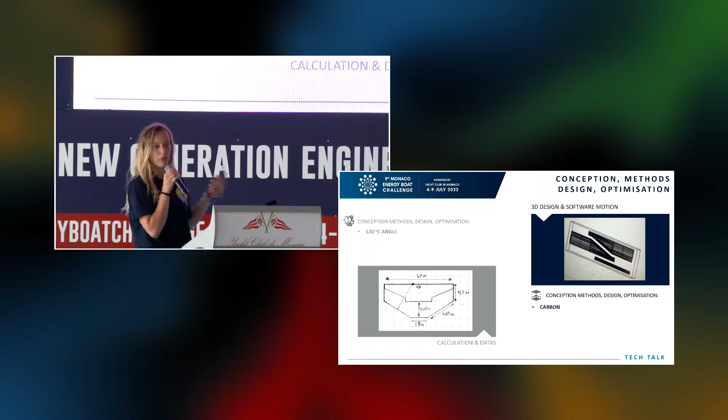The V-foil we have from another team called Dutch Solar Boat Team. Our V-foil basically consists of 3 foils, made from carbon. In the bottom you can see a 120 degree angle, and in the back we have a T-foil, also made of carbon fiber.

How did we make this? We made the foils with carbon, and we made struts. With the struts we connected the foils, and through press lamination we connected the struts to the foils.

But we have some problems, so we cannot sail at the moment on the hydrofoils because the boat could not handle the pressure. Our hull actually broke a bit in the middle, so we fixed it again with carbon, and it's also very hard for us to sail stable.

So we have a control system in our boat, based on the height of the boat and the difference between the boat and the water, which allows us to sail stable. But at the moment it's not really optimized, so we need to work on that.

So far we did some testing on the foils - you see the picture on the left. We had some problems with our engine, so we used a tow boat to move the boat forward, but it was not very stable. Due to the weather conditions, our top speed was 17 kilometers an hour.

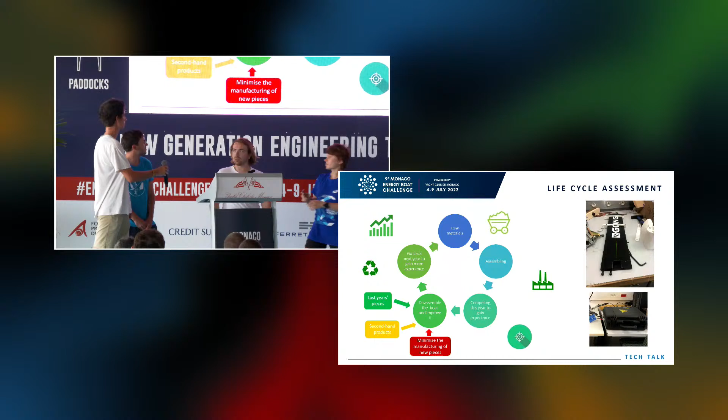So we tried to use recycled parts, so from last year's boat, or to buy parts from other teams' boats. For example, the battery is from the Estaca team, and we try to reduce our buying of new stuff.

One innovative part of our boat is an application that the drivers use to get information from the battery directly in front of him. So he gets the speed, the temperature, and the intensity and the voltage of the battery and the control part of the battery. And he can then communicate this information to his partners on land.

So to conclude, the main innovative parts of our boat is the direction that we entirely designed and built part by part, and this application that calculates everything and controls everything. Thank you for your attention.

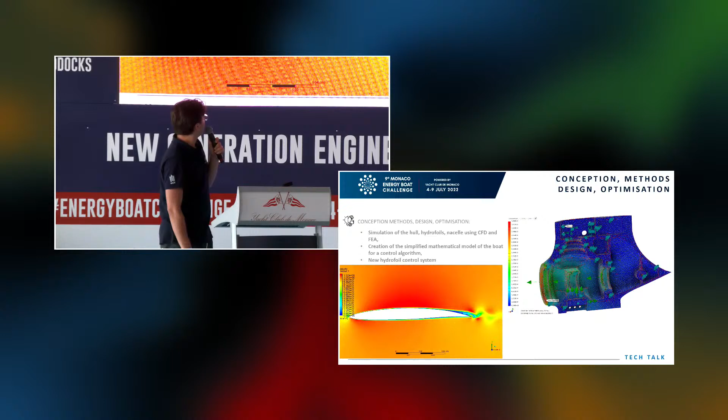Conception, methods, design. We make heavy use of CFD simulations and FEA simulations, as shown here. Here are some of the results from our CFD simulations for the hydrofoil and the nacelle, showing flow around these 3D objects. This is just a 2D slice, but it works for 3D also.

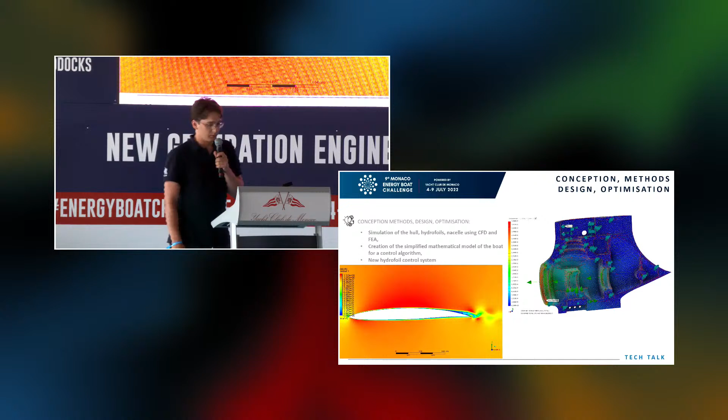We also happened to create a mathematical model for our boat, just to develop the algorithm for controlling the hydrofoils during flight and during ascent. And this year we've also designed, though it hasn't been implemented yet, a design for the new hydrofoil system because our last one didn't really do a good job.

The materials used in the production of the boat, which was actually started like 3 years ago and we finished last year, is mainly carbon fiber with aramid honeycomb and epoxy resin. But then there's also some glass fiber and aluminum and steel, mostly for the drivetrain and mechanical parts, and obviously electronics.

This year we've faced a couple of problems, the main one being the relocation of our workshop, as shown on the picture on the bottom. Our old one was destroyed by the university for some new building they're putting up right now.

And also everyone, I'm sure, has been really hit by the semiconductor shortages, which is a big hit for electronics. Also, there's still some COVID in Poland, and as we said, not proper machining equipment due to the workshop relocation.

For our testing, we also use CFD to validate our designs. Or rather, we validate our results afterwards when testing on water, checking if everything's all right, if it works as it should, as it was simulated before.

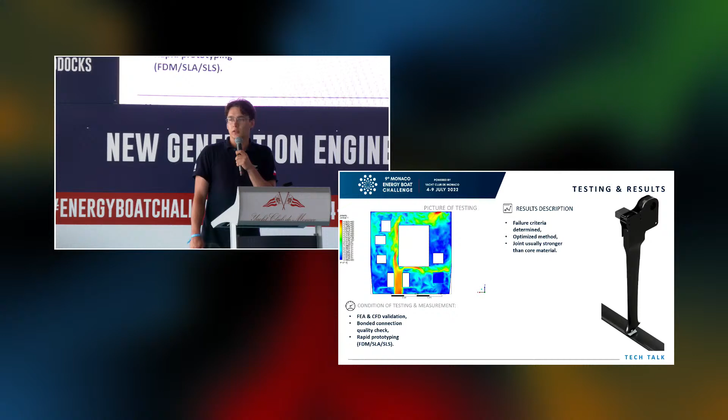We've come to an interesting conclusion that usually when the correct application of the joint is used, the joint is stronger than the core material, so we won't have any breakage on joints, just material breaks.

As for the life cycle assessment, this is an eco-friendly topic, as will be the next slide. We try to do everything eco-friendly if possible.

Every hydrofoil can be used on another boat that's compatible in terms of the mounting point, which we try to do with our boats as much as possible.

Also the solar panels, which is a very tedious and difficult process, can have their individual cells replaced in the whole panel, which also extends the life cycle of the panel.

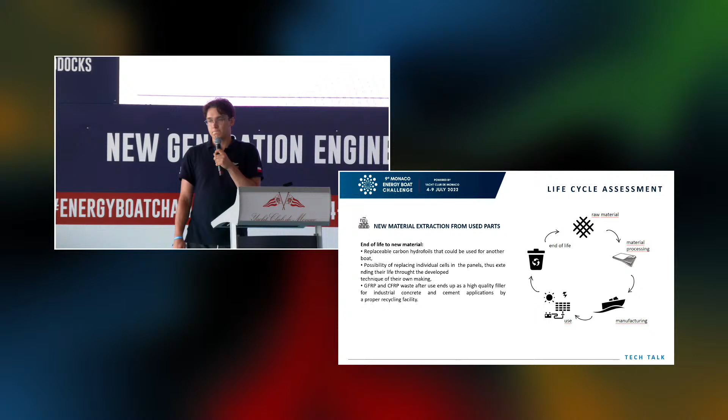As said here, glass fiber and carbon fiber, after they've been used to build the hull or the hydrofoil, can be reused as high-quality filler in industrial applications.

More about the ecological design: the motor cooling system is built completely out of 3D printed parts, and the water is taken from the body of water we're currently on, in this case the sea, and it's used for cooling.

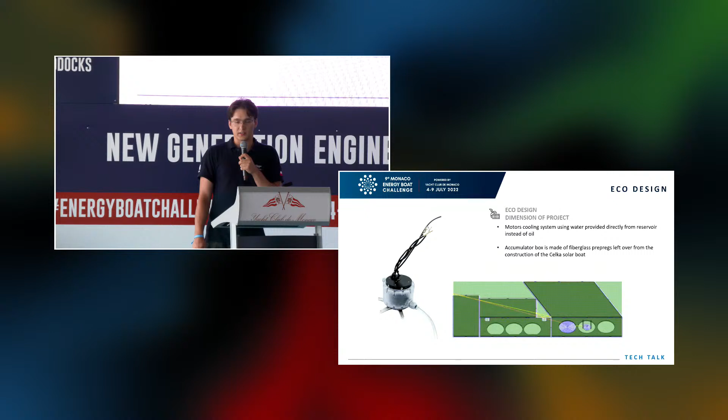The accumulator, the battery box, is made of fiberglass that's been left over from the boat's construction.

The new thing we brought this year with our boat is the new accumulator box, which has an unusual shape, allowing us to save a bit of space inside the electrical box. As I said before, it's designed from leftovers, so it's pretty eco-friendly.

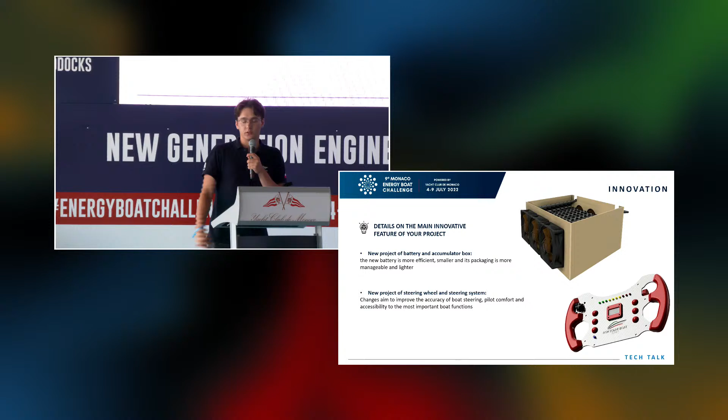We also have a new steering system which supports a steering wheel, just like on the render here on the bottom right. It's a bit easier to use for our driver, and it's also much smoother than the previous implementation, which was like a yoke drive.

As for the industrialization of the project, we mainly focus on getting as much knowledge as we can out of building these boats. So our value really lies within the people.

We have many people currently in the industry working as consultants in different areas, mostly well educated in composite materials, software engineering, and electrical. Coming out of our project, you can really find a job, no problem. So I suppose that's one way of using our project in the industry.

We also have an idea about building end-to-end solutions with solar boats or just composite boats, because we have a lot of know-how in this area.

Okay, thank you for your attention.

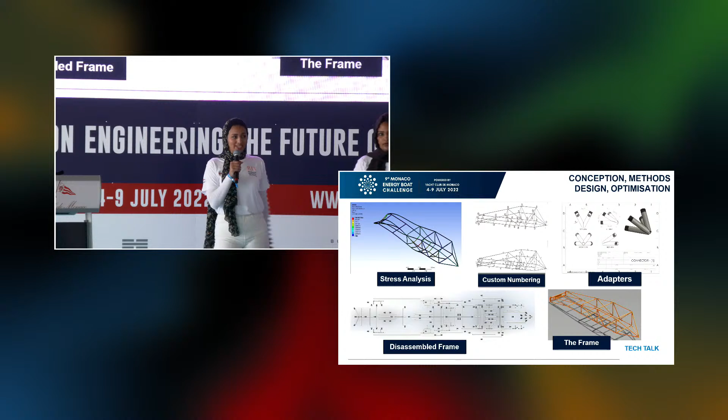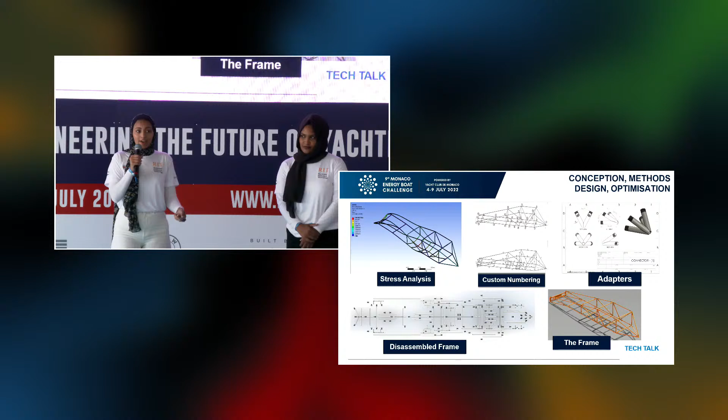Imagine you want to ship your boat from here, Monaco, to the UAE, but then you realize the hassle of shipment, the time-consuming process, and how long of logistics it would take. We are here to give you the new innovation that we came up with after we have seen last year's team suffer with the shipment. We are here to introduce to you the dismantleable boat. How? You can literally dismantle the boat, put it in your carry-on, and just take it on the go.

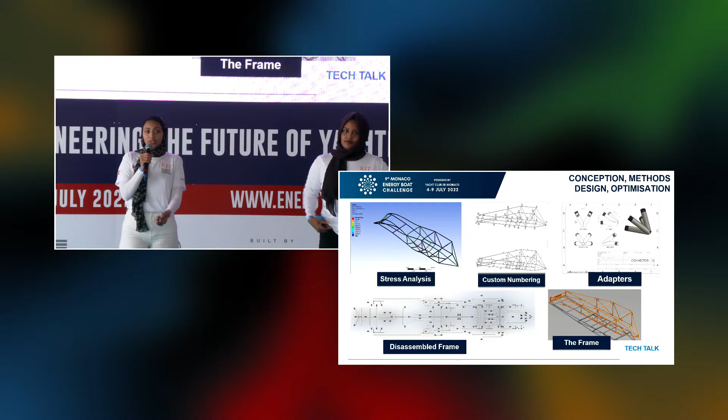The way we did it, we have 55 connectors and 88 adapters. And the concept started with SolidWorks design, each being rejected by our mentor, to next reach to the mathematical modeling, and that would give us crucial data that the team would need to anticipate the races and how the behavior would go. With that, we didn't stop.

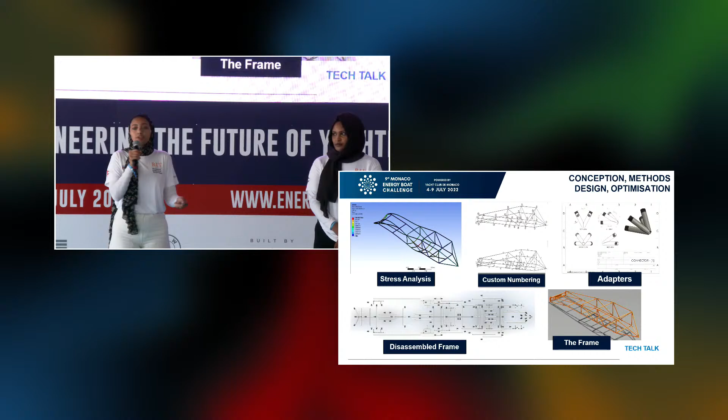We did ANSYS simulation, where we were able to find the stress points on the frame and the hulls, also the propeller. We have experimental data, which will next be used by the next team to customize whatever they want to customize in the boat.

With that, we next moved on to choosing our materials. The frame itself is made out of 3 different materials: stainless steel, mild steel, and aluminum, all combined together to make up the frame. These were used for the pipe fitters, the tubes itself, and the metal plate at the back to hold the motor. The project itself took us 9 months to finish and cost us about 21,000 dollars.

And like the beautiful streets of Monaco, our journey was not straight. We had issues with the adapters where they were not compliant with the pipes that we had, so we had to modify them to fit the pipes that we already had at the workshop. Also, the center of gravity was another issue.

Because of that, we were able to come up with the idea of having a movable IP box to adjust the center of gravity whenever we need. Also the drag, and that's why we came up with the idea of having a movable motor plate at the back, so that would help us reduce and minimize the drag. And the symmetry was no longer an issue after having an adjustable boat.

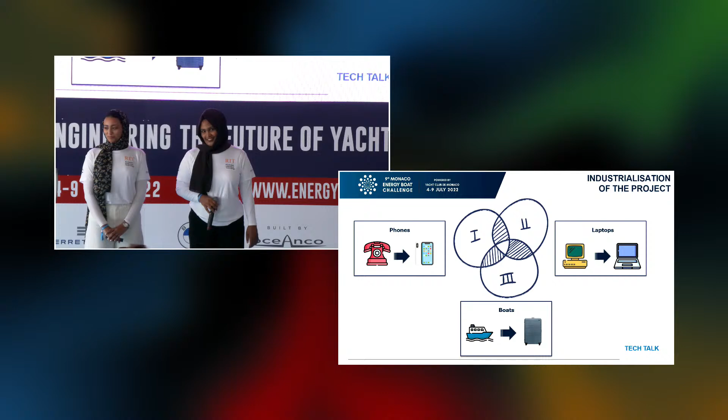Beautiful, congratulations. Thank you. Is someone ready for the question?

I was wondering, if you had no limitations in your budget, what would you like to investigate more? Different material, definitely, because our boat is a bit heavy, so if we could use a different material like carbon fiber that would be great. It would make it much lighter and probably much faster as well.

I was wondering, if you take the boat apart and assemble it here on the dock, how are you dealing with vibrations in the boat while sailing? The adapters themselves are union adapters, and they're welded onto the tubes themselves. We did it and we took it out - they're back at our university. Vibrations are handled well because it's made of mild steel and the adapters are stainless steel, so it's sturdy.

Thank you. Another question? The same? Perfect. So congratulations, that was a very, very good presentation. Sorry, Florestan, I didn't see it.

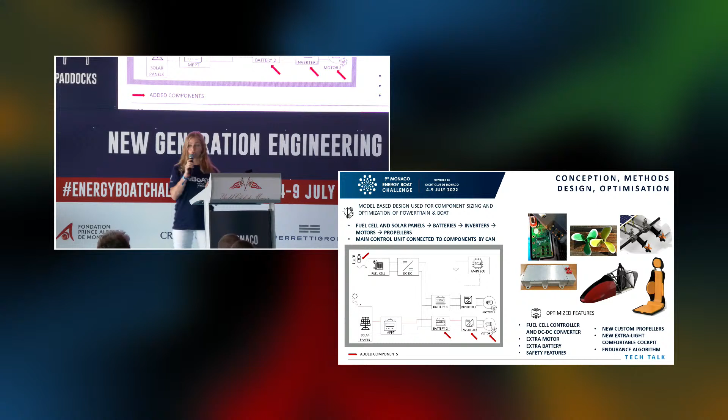This year, we decided to optimize almost every component of our boat. As you can see, we decided to build DC-DC boards for our fuel cell. We decided to implement a double motor configuration. We added another battery, we restructured our cockpit with a new seat, and we 3D printed custom propellers.

The 6-month production period with a 30,000 euro budget, which we had to efficiently manage among the different division teams, required the use and mechanical expertise of different materials. We resorted to 3D printing for our custom propellers. We used recycled carbon fiber for the cockpit. We used bamboo canes for the solar panel frame. And we even used a byproduct of orange and cacti fiber for the cushions of our seat.

The production wasn't exempt from problems, many of which arose during testing. First of all, we had to face the troublesome integration between 10 independent embedded devices, as well as the electrical and mechanical coordination between our 2 motors. Another big issue we faced was the tuning and fixing of the algorithms while at sea. We were often, in fact, on another boat connected to Futura with cables directly to the motors.

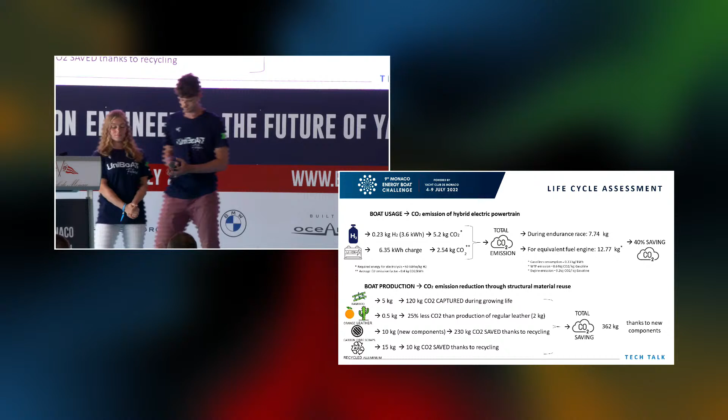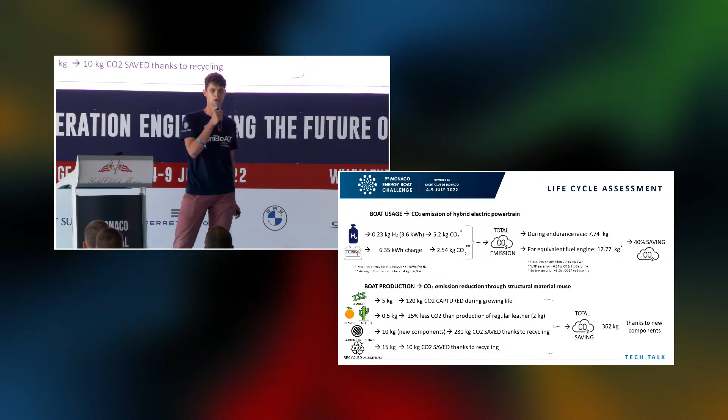Hi everyone. Talking about life cycle assessment, this year we performed an assessment on carbon dioxide emission savings. Regarding the boat usage, if we compare an internal combustion engine with our hybrid electric powertrain solution, we are able to save more than 40% of carbon dioxide during an endurance race.

Regarding the boat production, this year we used several different materials like bamboo, orange leather, recycled carbon fiber scraps, and also recycled aluminum. With all these materials, we are able to save more than 360 kilograms of carbon dioxide.

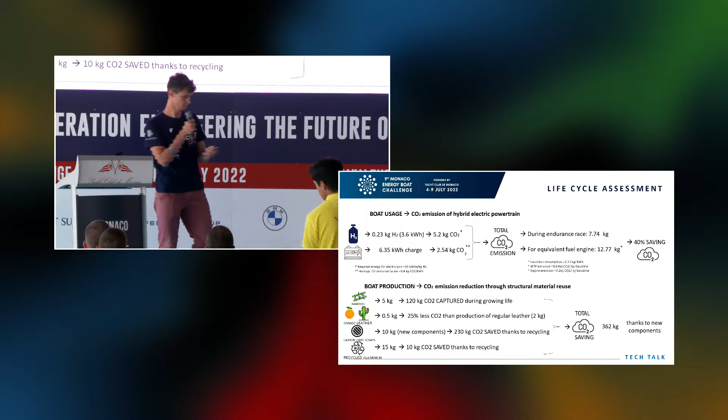Going deeper with some materials, bamboo is a valid alternative solution to aluminum, and we exposed the material itself to an open flame in order to increase its mechanical properties.

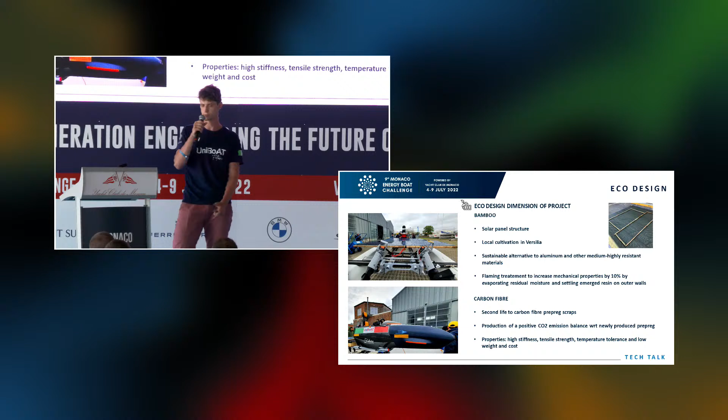Regarding carbon fiber, we use a method that gives a second life to carbon fiber prepreg scraps, and one purpose of it is the production of a positive carbon dioxide emission balance.

Talking about many innovative features, the first one is the implementation of 2 motors, also because this year the total energy available on board has been doubled respect to last year. Each motor has its own hydrodynamic profile, its own inverter, and they rotate in opposite directions.

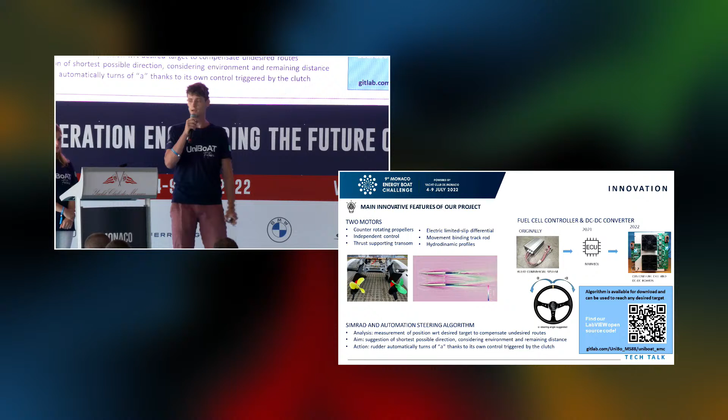In addition, we implemented a differential electric control to make the curve narrower, for example during a championship race or a slalom race. The second main innovative feature is the fuel cell: the realization of a custom fuel cell controller and a custom DC-DC converter.

The DC-DC converter allows the fuel cell to recharge our batteries, and it switches at a higher frequency in order to have a lightweight component. The fuel cell controller allows us to have an efficiency of 48% due to less loss in the components.

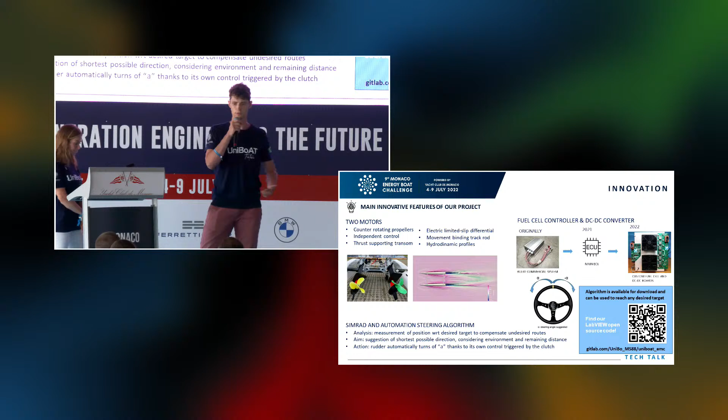The last but not least innovative feature is the implementation of the route assistance algorithm. It suggests the azimuth of the shortest route possible in order to reach a target like a buoy, and it provides this information to the automatic rudder, and thanks to its own controller implemented by the team member, the automatic rudder starts to steer.

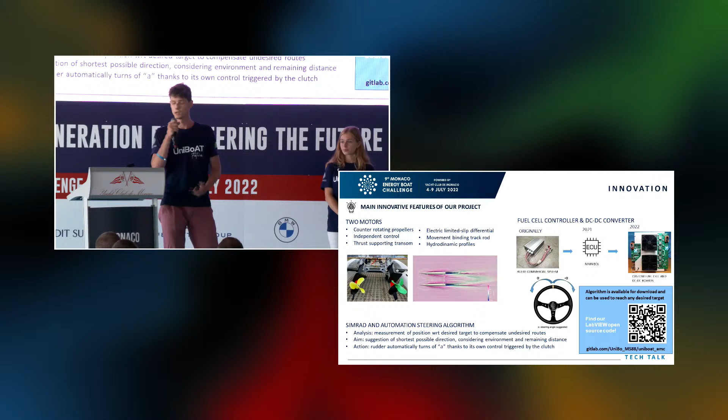In addition, also this year we decided to share with other teams this algorithm because we believe in the philosophy to share information and grow up together.

Regarding the industrialization of the project, we have in our boat a lot of redundancies because we think that it's a key concept in order to attain reliability.

Regarding the efficiency gain, we have, for example, lightweight components, but also the route assistance algorithm; we increase our efficiency from several points of view.

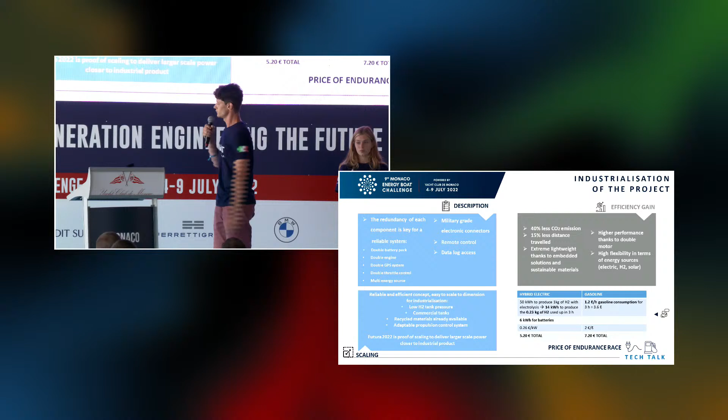We have a custom electronic board and other custom parts, but also some standard components like transducers that are already available on the market, and thanks to that, our prototype is really closer to an industrial product.

Lastly, we made a cost-benefit analysis, and we compare our solution to a boat with a gasoline engine, and we are able to save more or less 2 euros during an endurance race.

Just to conclude, also this year we decided to implement a mixed source energy solution because we think it is the right solution in order to have good performance in terms of durability, but also in terms of max power and max velocity. I conclude.

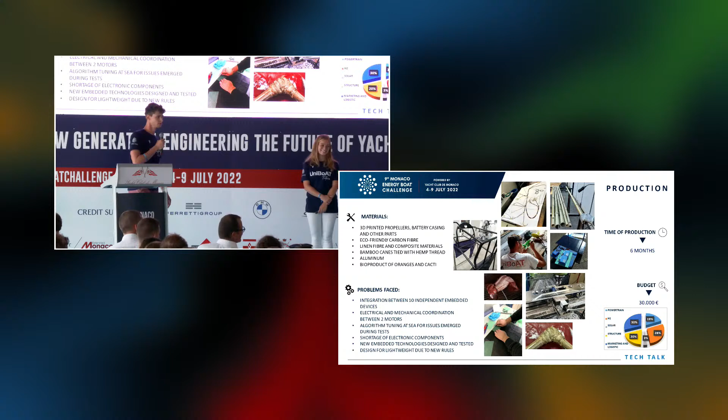No problem. A question about the weight. Have you considered the boat that you had last year versus the boat of this year? Is there a big difference in weight or not? You are going to a double motor instead of a single motor. Since you are in the water, and one way or another you are displacing water, the weight plays a role. Have you considered also putting on board maybe a very light pilot or not?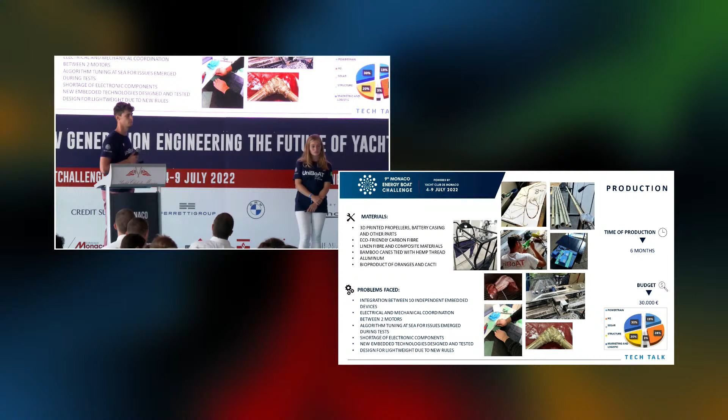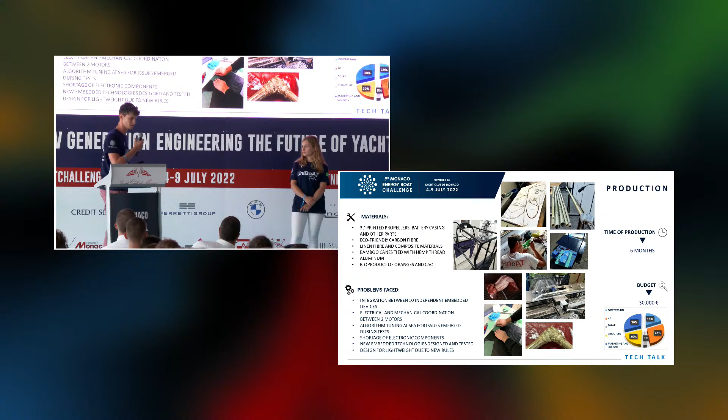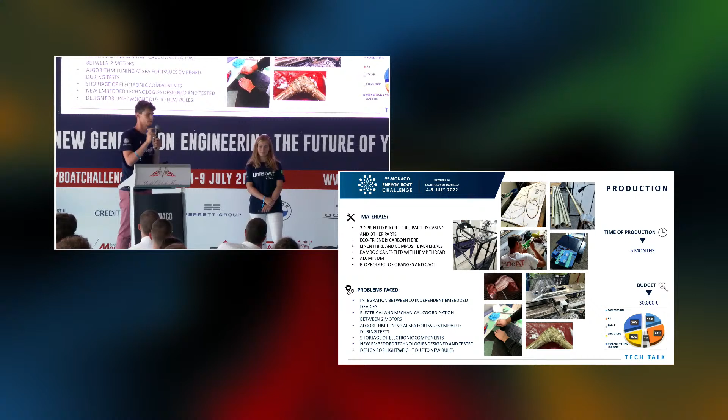Yes, we take into consideration the weight, of course. In fact, we have double of a lot of things, as I said, redundancies. So 2 batteries, 2 motors, which increases the weight a lot. In general, we decided to substitute some materials, like the structure panel from aluminum to bamboo, and also the cockpit from steel to aluminum. With this solution, we try to also respect the rule on total weight.

A question about material: in which material are you making your propeller? To design your propeller, you use a 3D printer? You said you made it with a 3D printer. And in which material are you making the propeller? Material, the propeller? Yeah.

With nylon. We realized the custom propeller with a specific study about it, and we designed it in 3D, then implemented and realized it in nylon material.

I have another question - I'm sorry, but you know I really push open source. I know you have a specific battery with a very high power density. Congratulations, by the way, for open sourcing this automatic drive system that you are offering to other teams. I guess that could be smart, especially for the long distance race. But could you please share with us a bit more detail about the battery you are using?

Yes, we have 2 packs of 3,000 watt-hours each, so in total a little bit more than 6,000 watt-hours. They use Li-ion cells. If you want the characteristics of the packs, I can give you: 21 in series and 14 in parallel cells, VTC6 cells. This is our pack. We realized it 2 years ago, also with the help of a university spin-off.

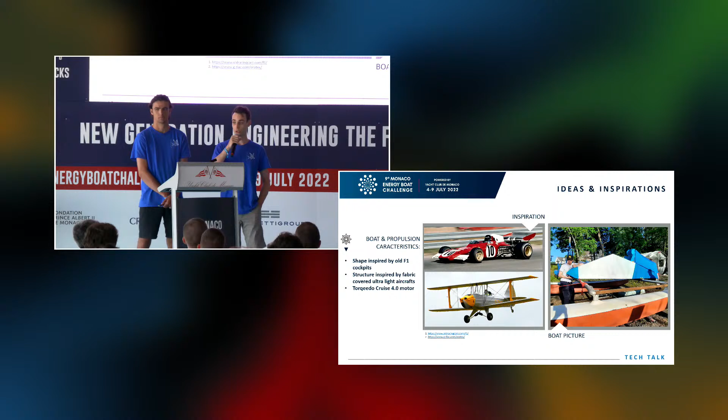For the inspiration of the boat, first the cockpit was inspired by old F1 cars, so we can see it a little in the shape, but mostly the structure was inspired by ultralight aircraft. Most of the team has an aircraft background. It's an aluminum framing with ultralight cloth that shrinks with heat around it, so it keeps the shape really well and is really rigid. We use a Torqeedo Cruise motor.

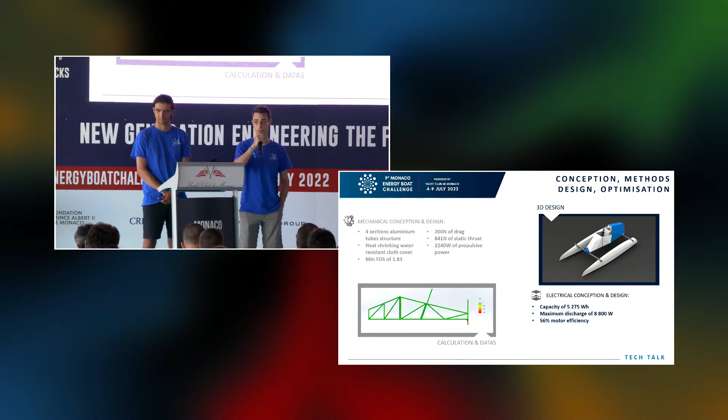For the framing, we use a 4-section aluminum tube frame. The boat can be shipped and dismantled into 4 parts, and we can reorient them to have a really small volume, so it can be shipped easily. The boat has around 200 newtons of drag and 800 newtons of static thrust. The motor efficiency is about 56%, and the maximum discharge of the motor is 8.8 kilowatts.

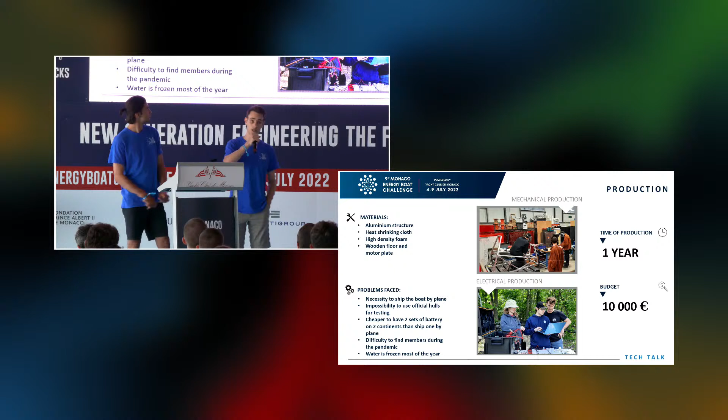For the materials, as I said earlier, we use an aluminum structure with heat-shrinking, water-resistant cloth. We also use a lot of high density foam for things such as the seat and headrest, and wood for things like the floor and the motor mount. The wood, however, is really hard to ship by aircraft because of regulations, so we had a few problems with that.

Speaking of problems, first of all we need to ship the boat from Canada - it's a big flight. We also initially looked at shipping the battery, but it was way too expensive to ship lithium-ion cells by aircraft. So instead we chose to have 2 batteries: we built our own battery in Canada, and we have our second battery, a Torqeedo battery, here in Monaco.

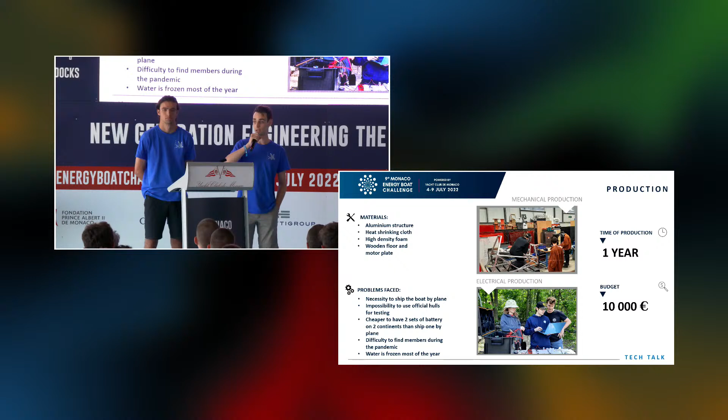Also, because of the pandemic, and we started the project during the pandemic, we had a lot of difficulty finding team members. So we're really grateful for the team members we have. And as I said, water is frozen most of the year, so testing is not easy in Canada. The project took about a year to build and cost about 10,000 euros.

About 40% of the project budget was only for shipping the boat to Monaco. That said, we still managed to do some testing a few weeks before shipping. We had a partnership with the Lac des Deux Montagnes sailing team, and we used recycled Hobie Cat 16 hulls that we modified to be a bit larger. However, the center of gravity and the weight of the boat were not the same, so we had to adjust for that, since the Monaco hulls couldn't be shipped to Canada. We also had a different battery, so the electrical specifications were a bit different.

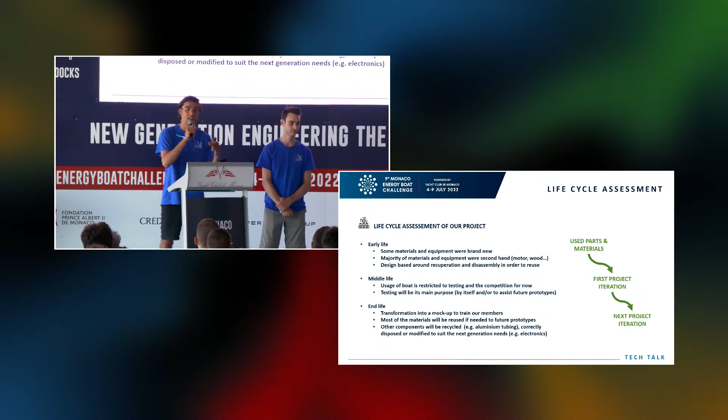Thank you, Mathieu. So for the life cycle assessment, we assessed the early life, meaning the construction of the boat. We used some new materials, but the majority of our materials and equipment were actually secondhand—our motor and battery are secondhand, as well as some wood and metal parts we reused. For the midlife, when we're using the boat, we just use the electricity from the battery. In Quebec we have lots of hydroelectricity from our dams, so we have almost zero emissions during consumption of our electricity.

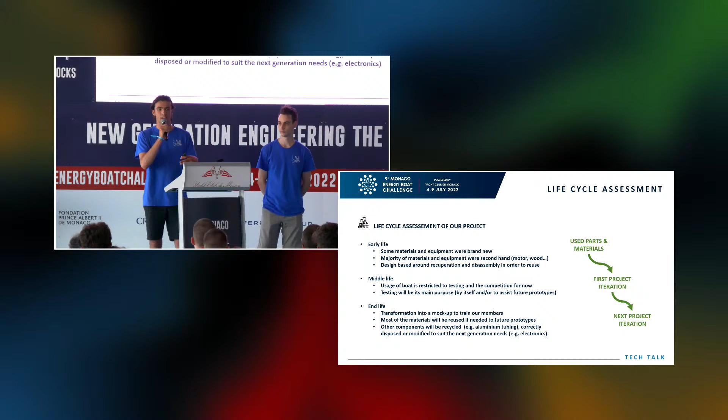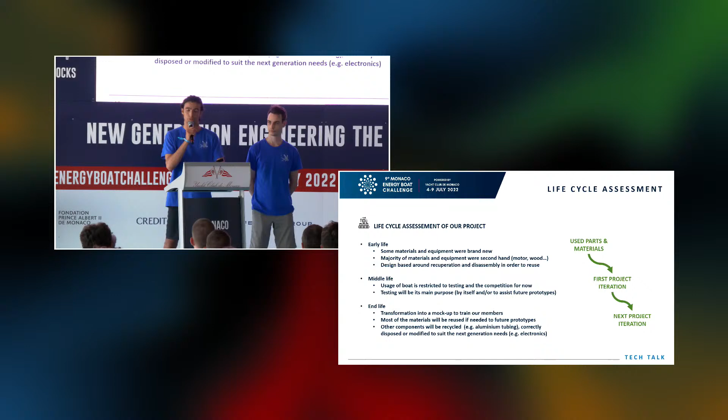Now for our eco-design—we put a lot of effort into this part. First of all, we used a lot of recycled materials. Fun fact: the pilot's seat is made of reused foam. The foam came from a group of students beside us who were scrapping it, so we took it, shaped it up, and made a nice seat for the pilot.

As I said, our main innovation was that we could take the boat apart, put it in a box, and ship it by plane—very cost effective and eco-friendly for this part.

Last of all, industrialization. We used a lightweight and rigid structure, which allowed us to have less weight to ship by plane—again, better for the environment and cost. We also used corrosion-resistant materials such as aluminum, so we needed less maintenance and didn't need any chemicals to protect the metal inside our boat.

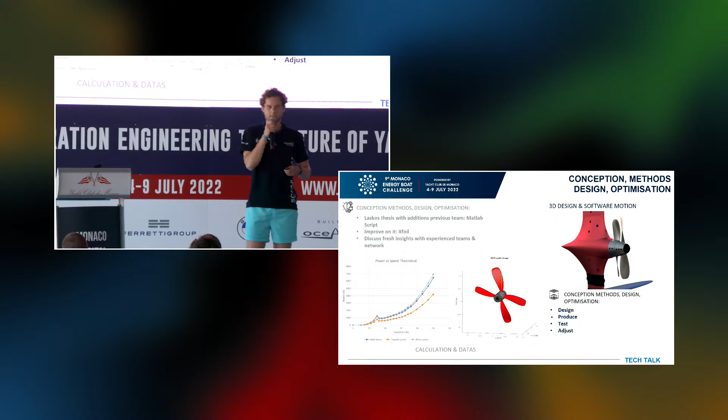So, beginning of this year, we started the innovation of our counter-rotating propeller. It's a concept that has not yet been widely researched, but we think has a lot of potential. The idea of a counter-rotating propeller is that the rear propeller counteracts the turbulence that the front propeller creates.

We started with an open source code that was already there. It was actually created by our first ever solar boat team. It is a source code that with just a few characteristics designs a whole propeller for you. We improved on this script by adding Xfoil, which will make the script more advanced when weighing the amount of drag versus lift you have in your propeller. After your design, of course, you have to come to production.

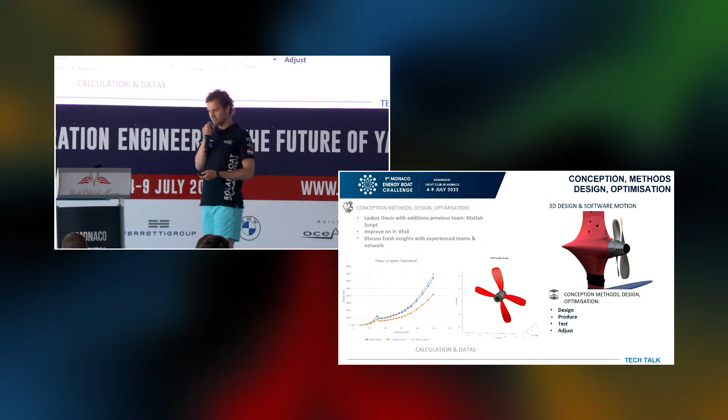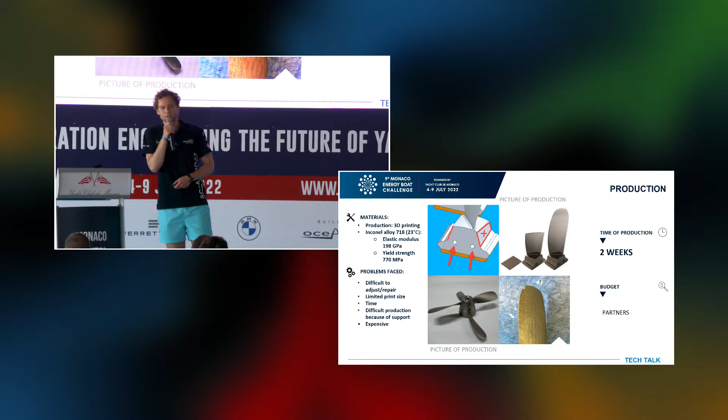Now, the method of production was a special one. So get ready for our second big innovation, because for the first time ever, we 3D printed our propellers, out of Inconel. This production method, as well as the material, has a few advantages. 3D printing is a quite sustainable process for producing our propeller in comparison to other production processes like casting and milling. It's also known as additive manufacturing, and it uses 98% less material than these other methods.

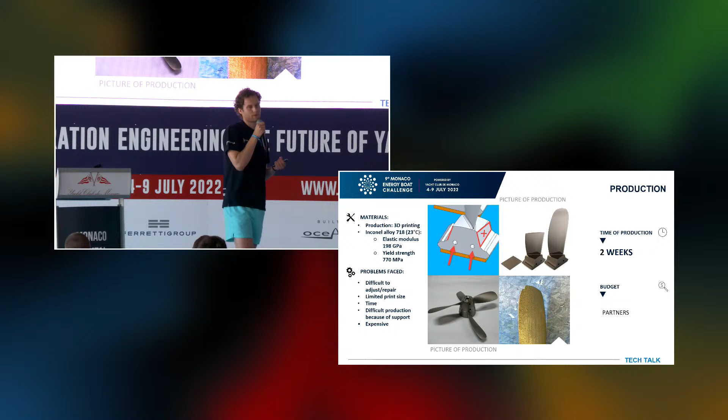Besides this, you are able to play with more complex shapes when 3D printing, and you are able to play more with your design. Inconel is a very strong metal. To demonstrate that, it's usually used in airplanes, so it's suitable for quite some extreme conditions.

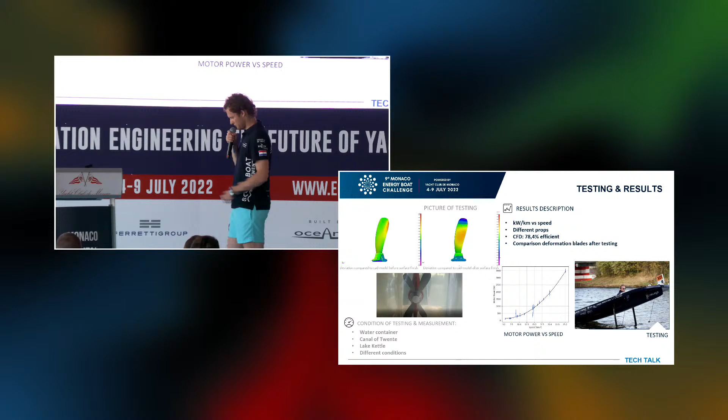Innovation like this, of course, wouldn't be fun without a few challenges. So we'll come back to those challenges when we talk more about industrialization. Now, besides challenges and their solutions, testing is needed to get a better iteration of our propeller.

We found out this year how important early testing is. So we test in and out of the water. Out of the water, we run computational fluid dynamics to get an indication of the efficiency of our propeller. Right now, the open water efficiency of our first iteration is 78.4%.

We also do some in-the-water testing. We like to know how the power we put in relates to the speed that's coming out. We do this in our home waters at the famous Canal of Twente, and we also like to simulate some more Monaco-like scenarios on the Lake Kettle.

So, how do we think our propeller is valid for racing? That you'll find out the coming few days. Do we think our propeller is fit for the industry? That I'll come back to in a bit.

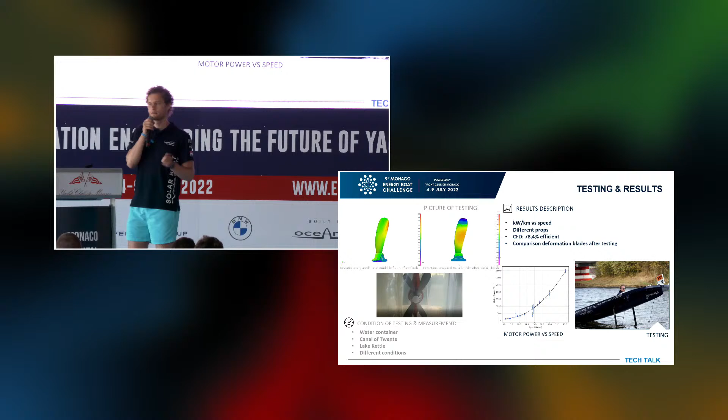Now, after all this talk about the propeller, I wanted to talk about something I stated in the beginning. The propeller is something that is characteristic for the way we look at sustainability and innovation here in Twente. Why is that? Because our other projects also have the same philosophy, one where innovation and enlarging the life cycle of our projects go hand in hand.

We stated a few examples here. For example, our new modular driveline, where it's very easy to get components out, optimize them, or even swap them. Also, we have a new modular solar panel system in which we can remove our solar panels, work on them, and also place them on our new boat.

Besides enlarging the life cycle of these projects, we also like to think about eco-dimensions when thinking about our project. Now, the main object we were talking about, the propeller, it was produced inside the region of Twente, and we actually like to keep a lot of our partners close. Half of our partners are inside the region of Twente. And lucky for us, as the Netherlands is quite a small country, other partners are always close.

Making our project more ecological and more efficient doesn't end here. Next year, a fresh group of students will work on new projects to support them. They'll tell you about our new gallium nitride transistors for our motor controller, and our electronic stability control system. But more about that next year, as we like to keep everybody a little bit excited for our projects.

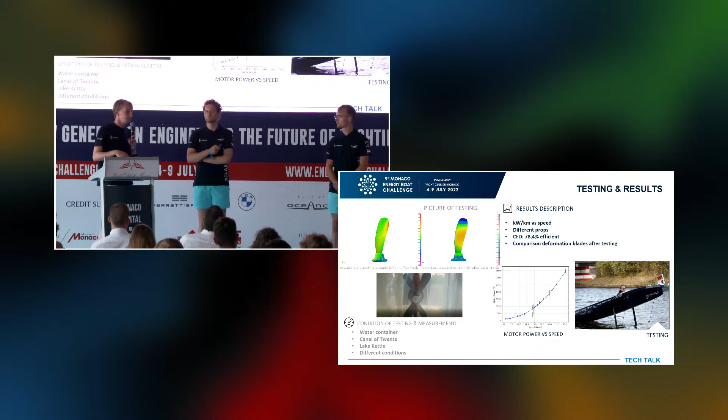Yeah, well, funny that you ask that, because we see a difference, but we're not ready to show the numbers yet. We had some different tests with an endurance test, and compared to last year, we could squeeze out more range. So that was good, but we lost the numbers from the year before - we only know that we came further, not how much. Since we did not change the boat, we can see we come further with this drivetrain, and we hope to compare this year to last year, and improve it further in the coming years.

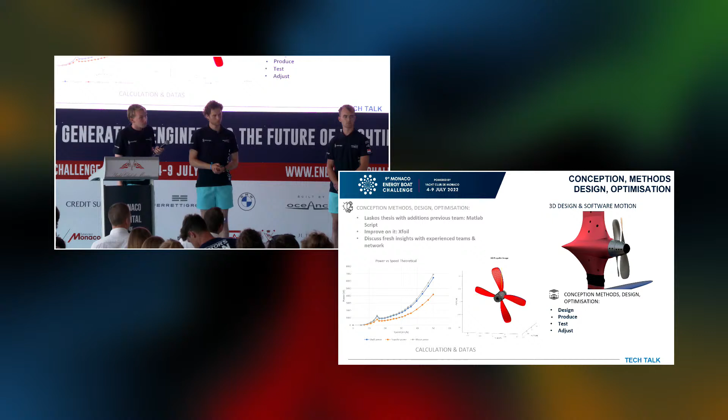Just to give an overall answer, we all know that a contra-rotating propeller can increase efficiency from 6 to 10%, let's say the average is 8% efficiency increase, and especially another 4% if we have the propeller in front of the rudder.

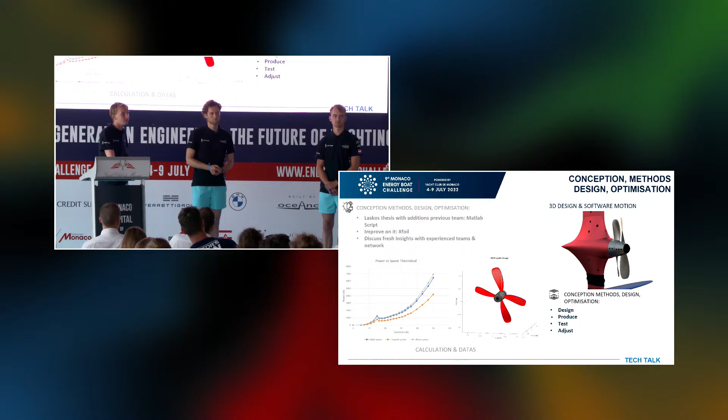I was very concerned on the previous slide about overall efficiency. Could you describe the efficiency calculations you have done on your boat? And another question: last year you developed a specific adaptive foil with a deformation material, linking the starboard and port foils together with a specific material. Could you give us feedback on that?

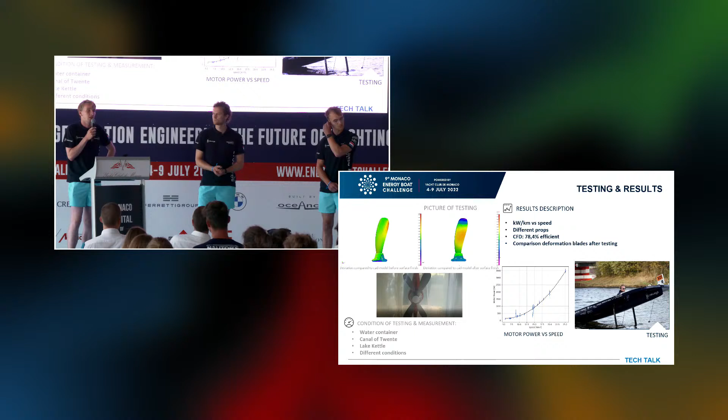The first question was about overall efficiency, right? Well, first we calculated theoretically, and that depends on what we put in and what we discard. Our first calculations came to 90% efficiency, which is ridiculous and not really comparable to the real world. So we also ran computational fluid dynamics to see what happens, and we saw a drop in efficiency. We are also testing in the water, and if we know the losses in our drivetrain and motor, we can recalculate and estimate the real-world efficiency. We hope it is close to the CFD data.

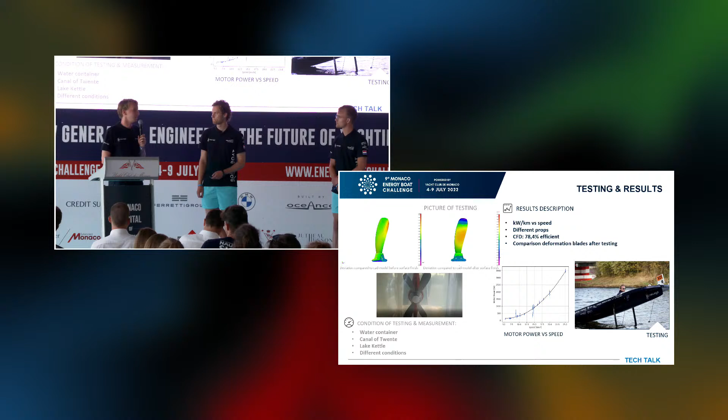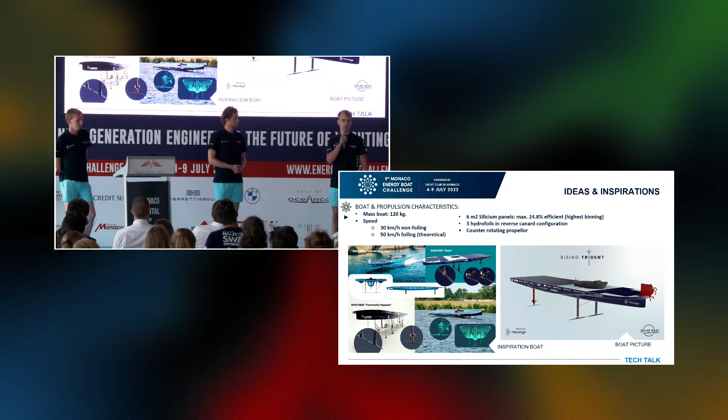For the second question, I'll give the mic to Jitse. About the flexible center wing - three years ago we had that design, to improve roll stability, since our first design almost six years ago only had small flaps on the sides to stabilize roll. So we thought maybe we could have a flexible center. But we researched it at Marin in the Netherlands, a research institute, and found it had more drag than benefit. So we changed to the three wings we have now, and later to a flap design, which is still on the boat from last year. Does that answer your question?

Yes. Okay, thank you so much.

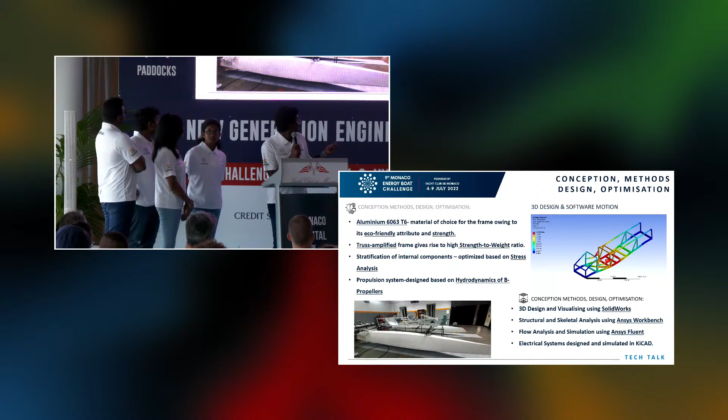Moving to the conception method and designing, we made our whole cockpit out of aluminum 6 series material, designed as a truss amplified structure to withstand all the stresses. Our propulsion system is designed using Hydrodynamics B propeller series.

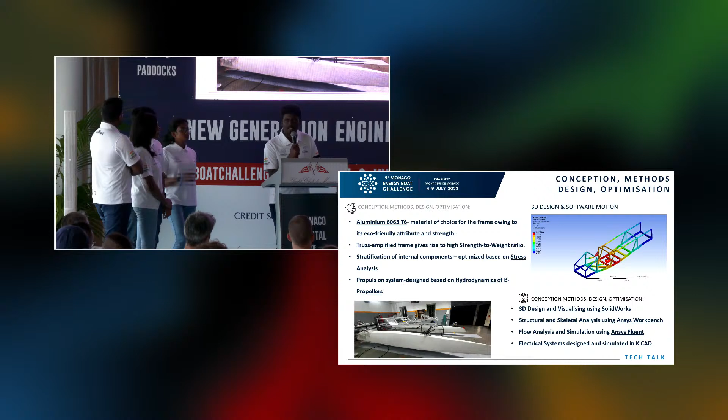For designing and validation, we used SolidWorks CAD software for visualization and 3D designing, and ANSYS to do structural analysis and CFD analysis of the whole boat and the propeller.

The electrical system of the boat is powered by a 48 volt lithium ferrous phosphate battery. We also have a secondary source which is a 200 watt mono PERC panel, which is connected with a smart solar charger, an MPPT, run by the MPPT algorithm.

Since it's a smart device, we can connect it to an Arduino or any other IoT devices, and the data can be read by the onshore team.

To measure the battery parameters, we have connected a smart shunt, also by the same brand, Victron. Both of these devices run on the VE.Direct protocol, so the data can be transferred as the same serial data. It is also connected to a self-developed custom dashboard, which the onshore team will be monitoring.

Moving on to the whole production of the boat, we started production in February and completed it within 3 months, so it took until May to complete the whole boat production.

Material-wise, we made the cockpit out of aluminum 6063 T6 material, and we made our own hull for testing purposes. It is made up of FRP material. There are 4 problems we have faced in India.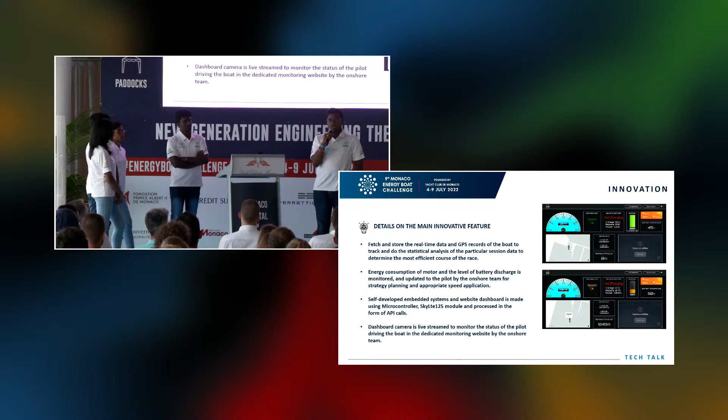A dashboard camera is fixed on the boat to live stream the boat view to the dashboard in the right side corner of the dashboard.

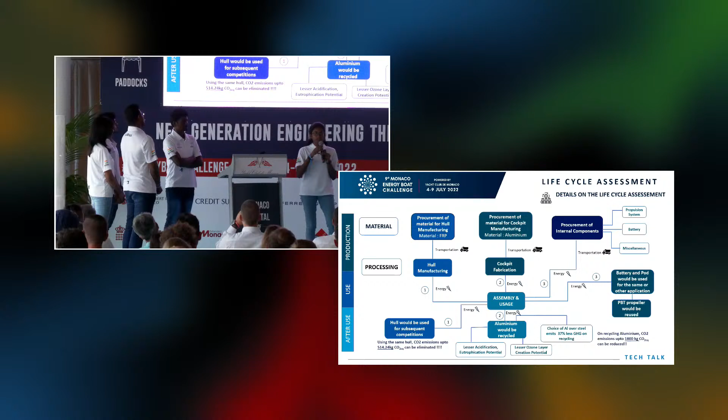All right, coming to the life cycle assessment of the project. Life cycle assessment is the effect that a product has on the environment throughout its entire life. The life cycle assessment of the project has been divided into 3 parts.

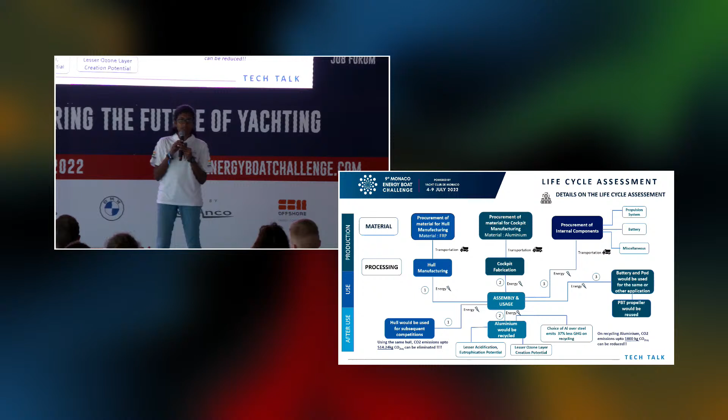These are the 3 prominent components of the project: the hull, the cockpit, and the internal components. The hull, though being provided by the organization for the competition, we wish to develop it for the purpose of testing in our home waters before the competition. The hull that we developed is 55 kgs and is made up of FRP, fiber reinforced polymer.

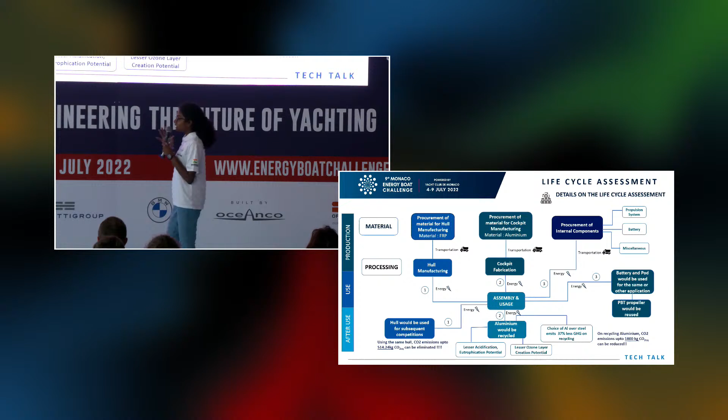The hull after the competition would be used for subsequent competitions in the next years, and it would also be used for similar marine-oriented projects. Reusing the hull even after the competition would lead to a reduction in CO2 emissions of up to 514 kgs of CO2 equivalent - indeed quite high.

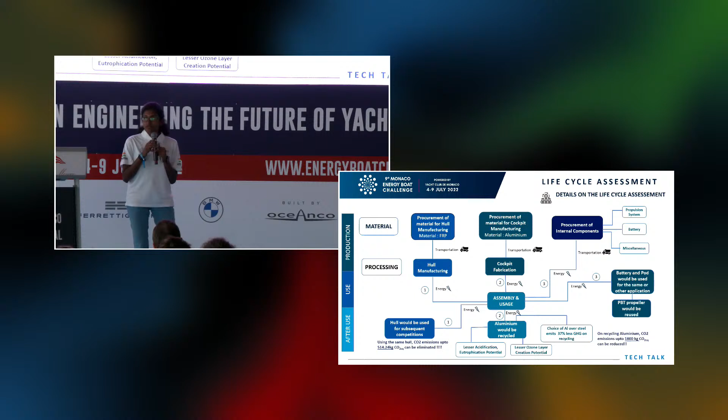Moving to the next prominent component of the project, the aluminum cockpit. The cockpit is fabricated using aluminum 6 series, aluminum 6063 T6. The cockpit after the competition would be recycled.

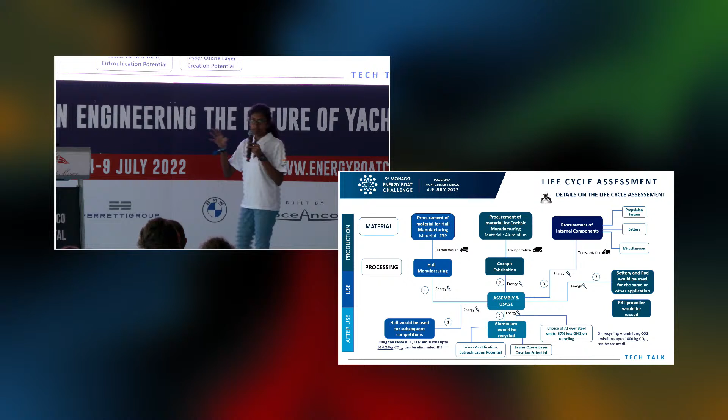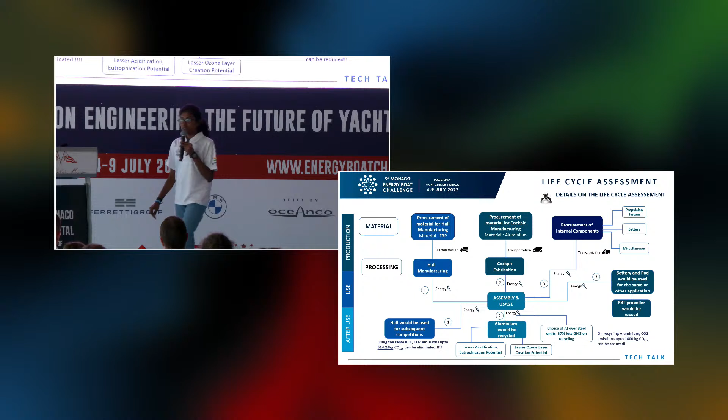Aluminum is known for its great capability of being recycled - 95% of the aluminum could be recycled. The choice of aluminum over steel, steel being quite popular when it comes to the development of chassis. We chose aluminum over steel because recycling aluminum after the competition would reduce CO2 emissions by 37% compared to steel. Recycling aluminum also has lesser acidification potential, eutrophication potential, and also has lesser potential to create ozone layer damage.

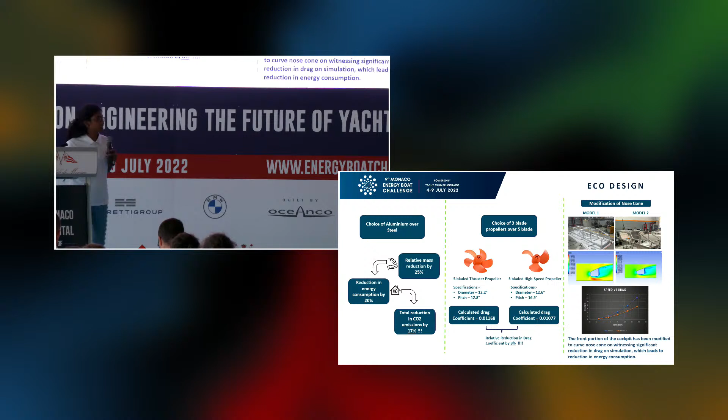All right, coming to the eco-design concept of the project. To make it clear and understandable, we divide it into 3 parts. First is the justification of choice of aluminum over steel.

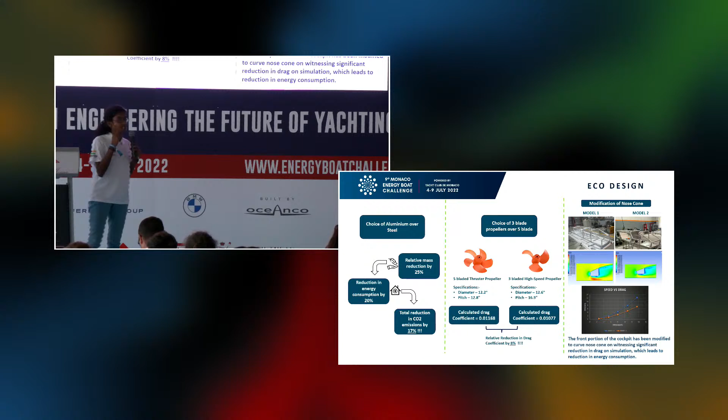The justification of choice of aluminum over steel can be justified in 2 aspects: one is the weight and density concept, and the next one is the capability to be recycled. Aluminum is 25% less dense than steel.

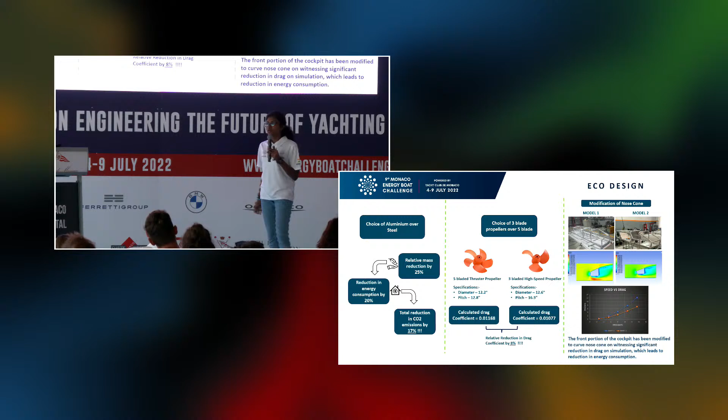Steel is quite popular when it comes to the development of chassis, so we did a comparative study between steel and aluminum. Aluminum is 25% lesser dense than steel, and lesser density leads to lesser water displacement. This leads to 20% reduction in energy consumption, which again leads to a reduction in CO2 emissions by a figure of 17%.

The next one is the choice of 3-blade propellers over 5-blade propellers. We use a 6 kilowatt propulsion system powered by Torqeedo 6.0 Cruise.

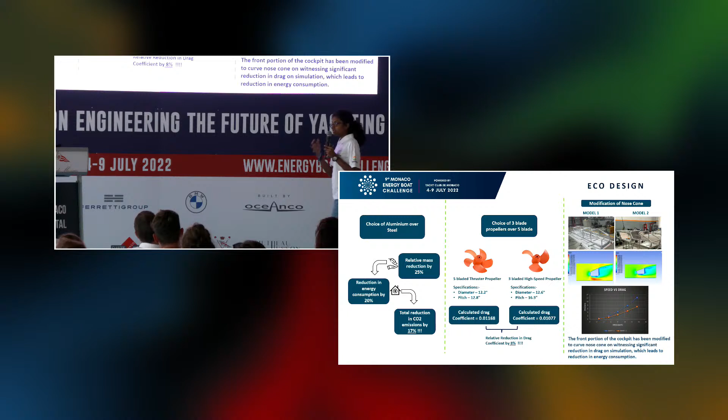The specifications of the 5-blade propellers have been mentioned here. We calculated the drag coefficient of 5-blade propellers and 3-blade propellers, and we found that 3-blade propellers gave a drag reduction of 8%. A reduction in drag can lead to a reduction in energy consumption, and a reduction in energy consumption can lead to lesser CO2 emissions.

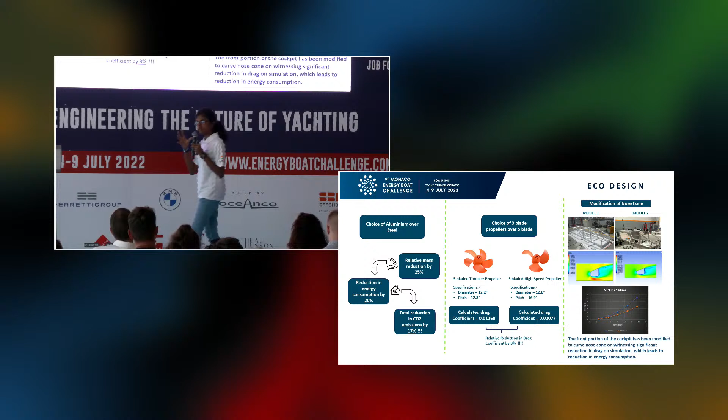The next thing is modification of the chassis from Model 1 to Model 2. If you look at Model 1, the nose cone, the front part of Model 1, has a rectangular shape, while Model 2 has a curved nose cone. This was done after a lot of iterations and modifications to the chassis.

The second model showed lesser drag and higher speed. Again, lesser drag means lesser energy consumption and lesser CO2 emissions.

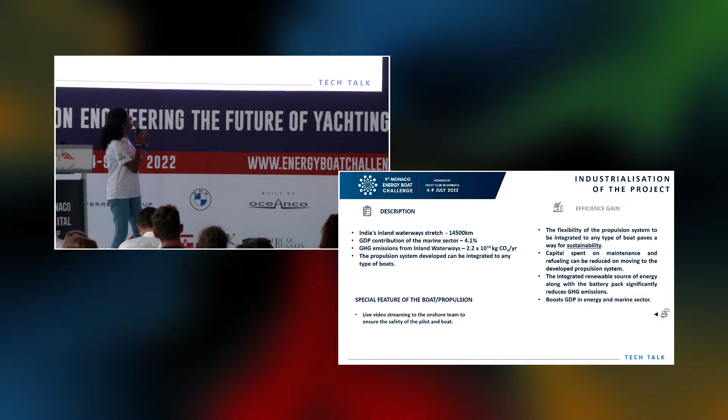Industrialization of the project: we come from India. In India, the inland waterways make up 14,500 kilometers, and the GDP contribution of the marine sector is 4.1% of the total gross domestic product. Unfortunately, the greenhouse gas emissions from inland waterways is about 22 billion kgs of CO2 equivalent per year.

Developing an electric boat from scratch may not be affordable for all, so we wish to develop an electric conversion kit which has the flexibility to be integrated into any kind of boat, any kind of small scale boat. We retrofit existing boats with IC engines using the electric conversion kit that we are making, and this paves the way for sustainability.

This electric conversion kit is aided by a solar panel, and it also comes with a special feature where the onshore team would be able to monitor the conditions and ensure the safety of the pilot. We shall see about it in detail in the next slide.